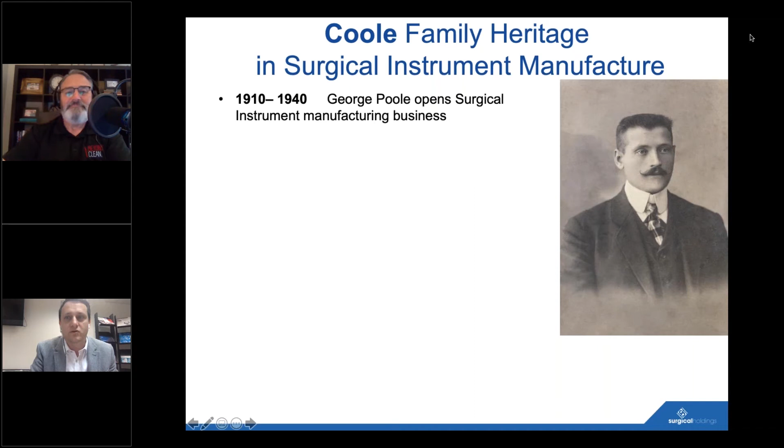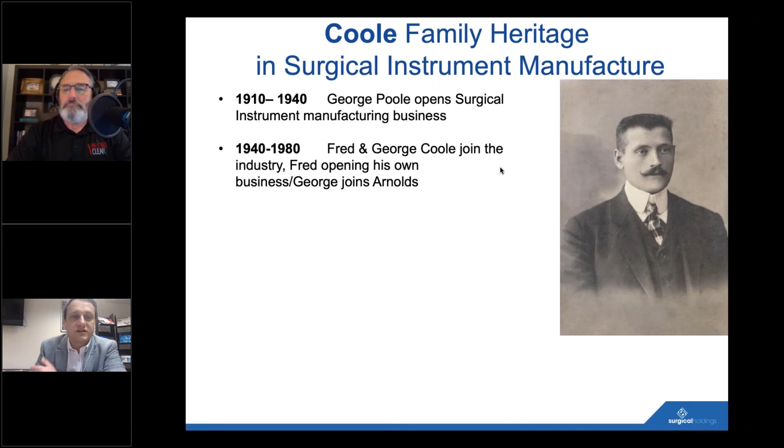But just to give a bit of introduction to myself, the reason I'm involved in surgical instrument manufacture is really a family heritage, and that goes all the way back to the early 1900s, where George Poole, it's not a typo, it is Poole rather than Coole, started a surgical instruments business in London. Then George was joined by Fred and George Coole, who were his nephews, who trained as surgical instrument makers from the early 1940s all the way through to the 80s.

And then Phil Coole, who's my father and the chair of Surgical Holdings, which is a company that I'm the MD of, got involved making surgical instruments as well, because there weren't enough of the family already involved. And Phil eventually opened his own business, Surgical Holdings, in '87, and we're still open and going strong. And finally, I've been involved for around 25 years in surgical instrument manufacture. I was an apprentice surgical instrument manufacturer and trained for a few years under apprenticeship. I don't think I was the greatest technically, which is probably why I ended up in the office. But yeah, I learned the trade and what it takes to manufacture.

I do have one slight admission here. The guy in the picture wasn't my granddad or great granddad. I'd actually just Googled man from early 1900s because I didn't have any pictures. So there we go, there's an admission. So I'll just attempt to get rid of my face for you all.

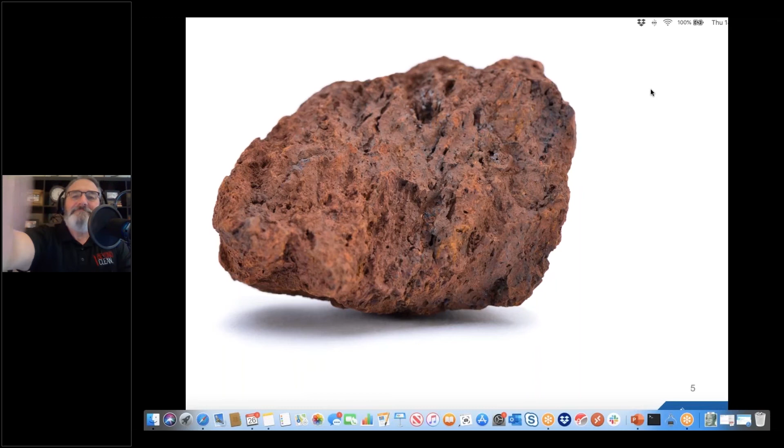So this is where we start, and for me, every story has to have a hero, and here we have the hero on the screen. I'd normally put it out to the audience to volunteer what this might be, and I've had everything from chicken nugget to, I think my son called it a piece of dinosaur poop, but it is actually a piece of iron ore. And the reason I feel this is the hero with respect to surgical instruments is that iron extracted from iron ore makes up the majority of a surgical instrument, around 80% of a surgical instrument.

And in addition to that, there are of course other elements such as carbon, nickel, and chromium that all play a part in the design of the instrument. So this is iron oxide. This is our hero, if you like, in his most comfortable state. This is the most stable state of iron. So just bear that in mind as we go through, and you'll pick up on why this is important.

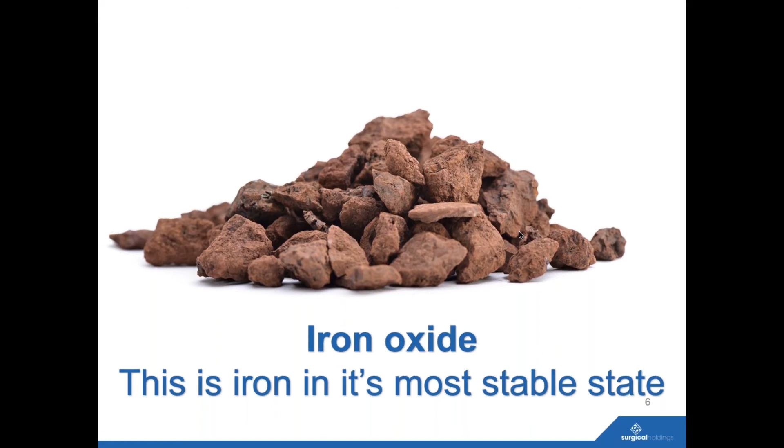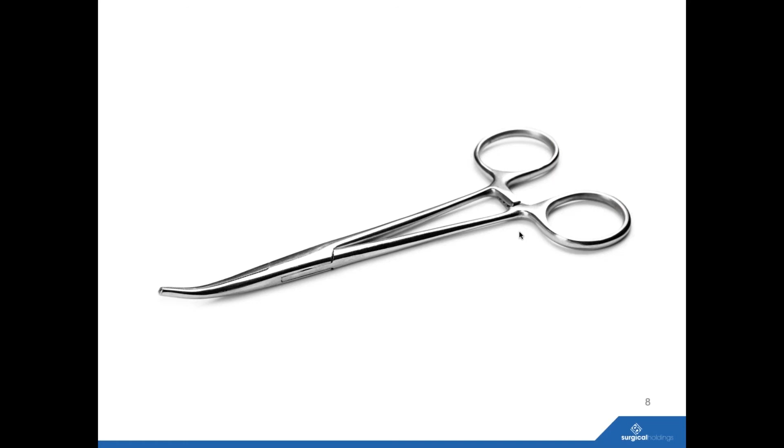So as we mentioned, iron in its most stable state is iron oxide. You have to smelt the iron ore to extract the iron, and then we put it all together, and as an alloy we have stainless steel. What might look like a nice shiny surgical instrument here, just bear in mind that there's a lot more going on underneath the surface. There are lots of different elements to it, the majority of which, as I mentioned, is iron.

And other elements: for instance, carbon gives a device its hardness, and chromium, which I'll mention, allows the device to be passivated. So rust, and we'll all probably have an image like this. My garden gate hinges are particularly rusty, but rust is nature's way of showing us who's boss. Iron plus oxygen plus water equals hydrated iron oxide.

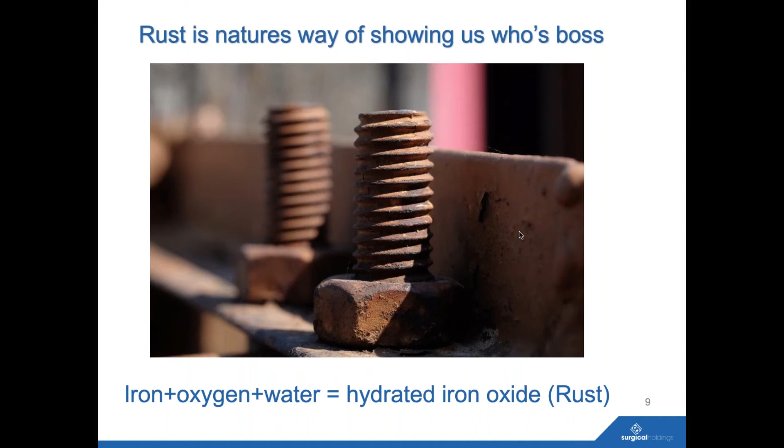So it's obvious to say that iron, in its most stable state, has a benefit of mixing with water because it allows it to form rust, and rust has a very close relationship to iron oxide. So there's the relationship there.

So what we have to do is play our part and be the bad guys in this relationship. That's everybody from sterile processing to surgical instrument technicians to theatre managers; all stakeholders are involved in handling surgical instruments. From a sterile processing point of view, the first step to breaking up this love story is to make sure that the instruments are completely dry.

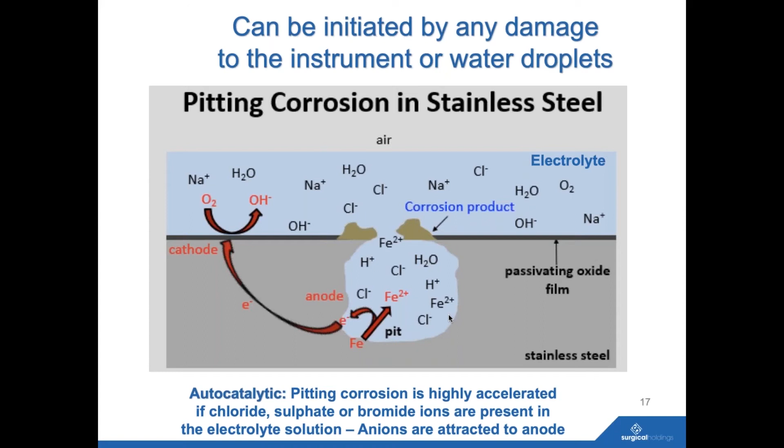This is the sort of image that you may see when you can see the start of chlorides attacking the surface of an instrument. Also to add that organic residues such as blood may also contain similar chemical properties as chlorides. So I think that's what you're saying, Bob, that potentially could kick off a similar attack on the surface of the steel.

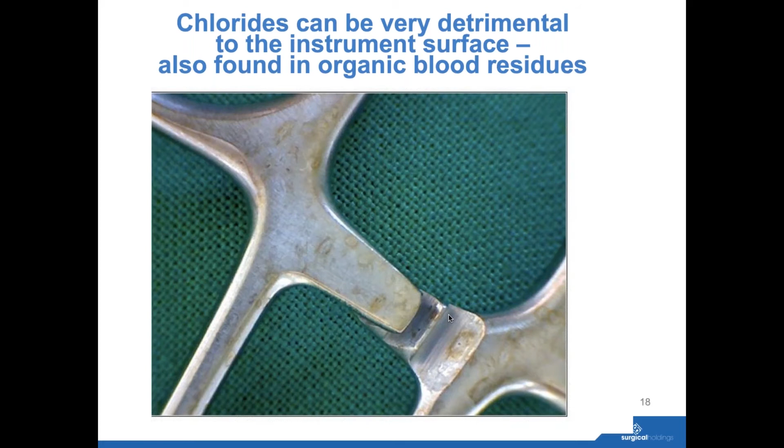Okay, perfect. So picking up from what Bob had said earlier, the vital importance of making sure that the devices are cleaned before they're passed to CSSD, because of also the issues around transit times and potential off-site sterilisation, where the bioburden could remain on the instrument for longer than we'd like, and that could start to initiate damage. And Daniel, one other point about that, some of the more susceptible instruments would be a needle holder, and the forceps they're using at the end of the procedure.

Often they're closing the patient, and these instruments will often be overlooked, and so I see a lot of corrosion where the tungsten carbide is soldered to the end of a needle driver or forceps where the blood stays on the instrument, because typically they're in a hurry to turn the room over, get to the next patient, and they'll toss those instruments in the set without really cleaning them at all, so they can have a big impact. I see it a lot on suture scissors, needle drivers, needle holders, and then the forceps that the surgeons are using.

Do you think that's because sometimes we've seen in the UK that some of the more common instruments, the likes of the sponge holders and stitch scissors, that are perhaps deemed to be the cheaper instruments in the set, may be overlooked, that they're not always replaced when they should be, just because perhaps they're not playing as key a part in the surgery? Absolutely. Yeah, quality definitely plays into that as well.

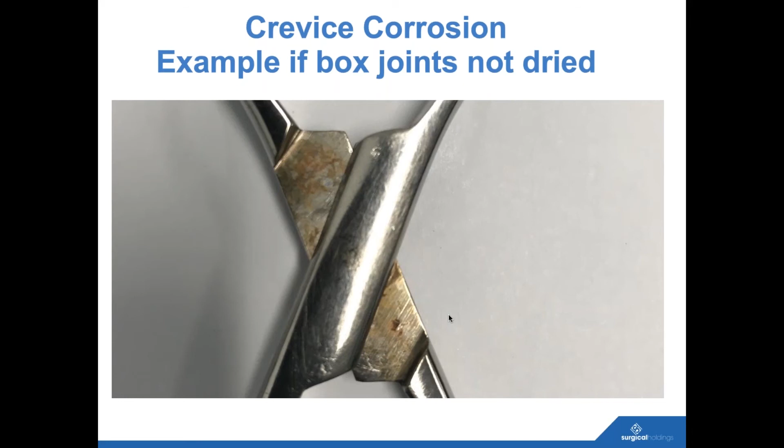Great. And so the image on the screen now, we have a crevice example. It's of how potentially you might end up with crevice corrosion in box jointed instruments, where essentially crevice corrosion is the same process as pitting. Here's just an image to show how you can start to get the corrosion from something like a box joint. The reason that this is called crevice corrosion is because for the instrument to remain passive, it has to have access to oxygen.

So with something like a box joint, you end up with this image here where you have a shield, which probably would be the box joint over the surface of the steel, but likewise it could be any sort of mating part. And of course, if water gets under the surface of that box joint or inside the scissor or whatever it might be, then the passive layer will start to break down. The process will be exactly the same as the pitting.

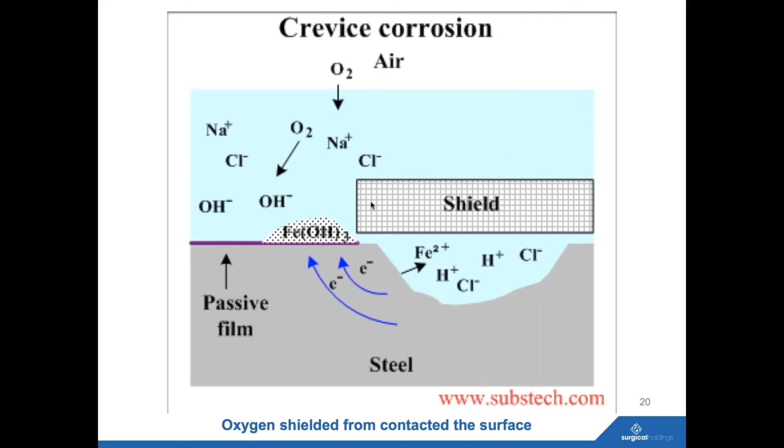So again, it will be sped up by the presence of chloride that will attack the surface of the steel. Free iron will be released, and ultimately, we've got a risk where the device could fail in use, which of course we do not want, and we want to do everything we can to avoid. So that's also to familiarise yourself with the term of crevice corrosion. Some of these processes will certainly be more common where there is only the presence of chloride. So what can we do as manufacturers and sterile processing departments to protect the instruments?

But the smoother the surface decreases the wettability of the steel. So that's essentially how quickly the water flashes off of it. In the UK, we quite widely use bright polished instruments, and I know that's not the case everywhere, but that does give you a really bright, shiny mirror finish that is of good benefit for that.

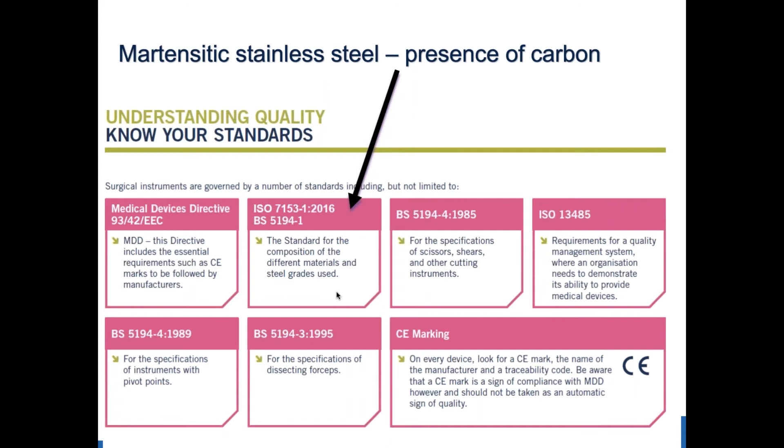But it's just interesting to pick up that you will have a variation in the carbon levels throughout the range of surgical instruments, depending on what they do. So something like a Spencer Wells, the carbon will be a lot lower, because when you harden the device, you don't need it to be as hard. You want a bit of flexibility there. So that's why it's really important that this international standard is followed.

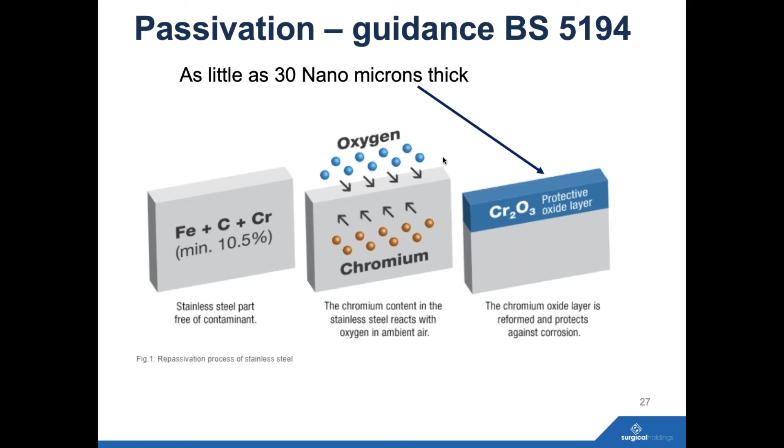And there is a British standard for producing some surgical instruments, albeit I think they're from the late 80s, from when my dad was at his previous company, and they haven't been updated since, other than the stainless steel standard. But there is a standard. It tells you how long you should passivate for. As I mentioned, it might be useful for people listening to have a look at that ASTM, because particularly for validating passivation, it's a good standard.

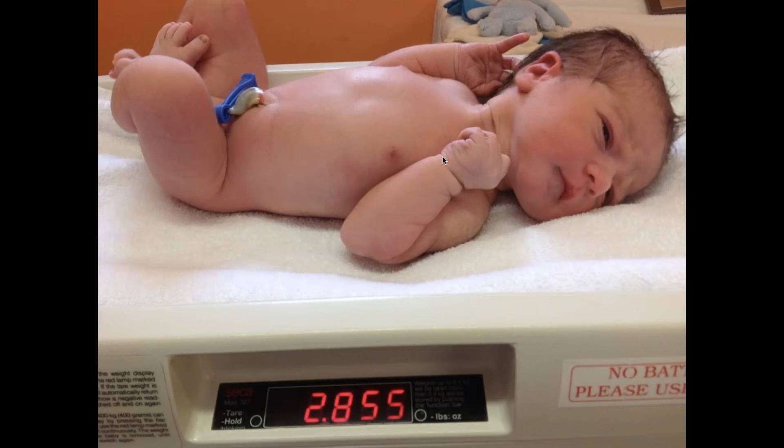So now we look at maintenance, and bizarrely, there is a picture of a baby on the screen, which you're probably wondering why, but this is my only real context of using a surgical instrument and knowing how important it was that it works. This is my son Charlie, back in 2012. I'm trying to remember his actual birthday. I apologise, I've got 4 children. He was born the 12th of June 2012, and I was able to cut Charlie's cord with a scissor. Don't worry, it's not actually this scissor.

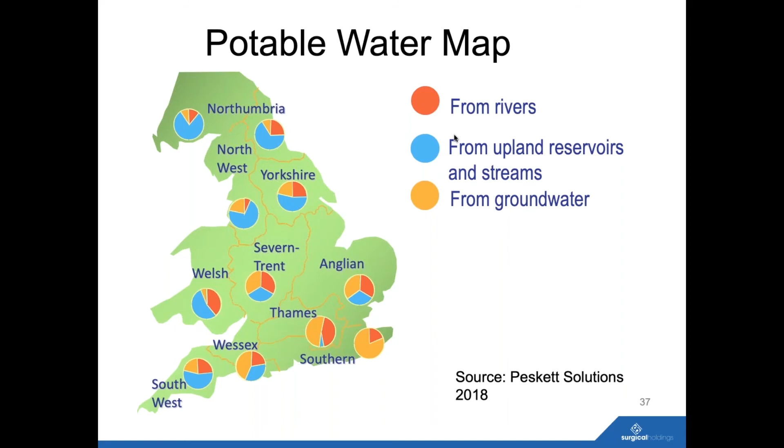So I think this is a really good bit of data to pull up. And what you can draw from that is that if you have issues with instrumentation, it might be pinpointing it down to your water content. I appreciate a lot of people have RO water, but it's certainly a consideration. And I'm no expert on RO water, and maybe it would be great to get somebody else doing a presentation on that so they can talk through the effects, but it's certainly a big consideration.

And when you have that sort of variety in content of potable water, and some... Daniel, I can jump in there a little bit if you'd like. Yes, please. So one of the things that we've always coached our customers on when you're concerning water and steam: a lot of healthcare professionals out there don't truly understand the impact that water and steam have on the instruments, and it is a huge impact.

So the four areas that we recommend that they look at are the pH level, the chloride level, and the conductivity level in the water and steam that they're using. Those three have the biggest impact on corrosion of instruments. The other really big one is silica that was on your list. That causes that brownish staining and really makes the instruments ugly.

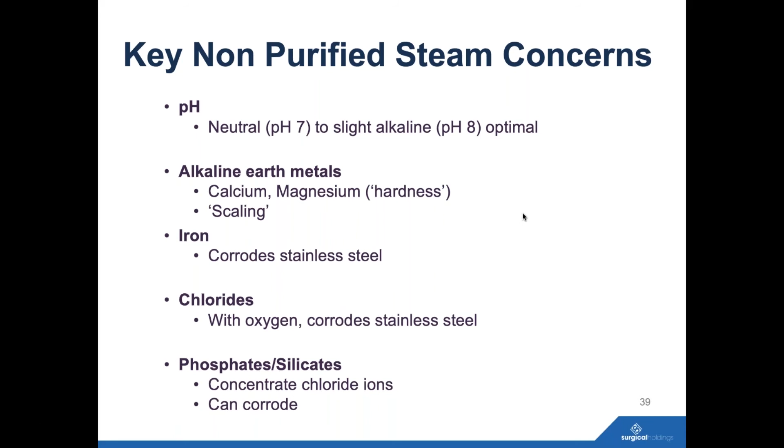That's something to certainly look out for, because you can have a hollow-handled instrument that could be full up with water that would then wash across, potentially when it gets in the vacuum, and leave all the other instruments wet. So that's just something that I think is worth mentioning as a key maintenance point.

And Daniel, I've actually had instances where when I open a sterile set to evaluate it, I've picked up a hollow-handled curette or a mallet, and I've actually had water drip out of it onto me. So it's going to the operating theater with basically contaminated water in the handle of the instrument. So great point.

Yeah, I had a similar experience in a hospital, talking to somebody in their sterile department, and they were giving us a bit of a hard time about certain things and how they should be validated. And I went to inspect a set, and the first instrument I picked up was some sort of hollow-handled retractor or something, and it sprayed in my face. So that was quite a shocking moment, really. But yeah, certainly something to look out for.

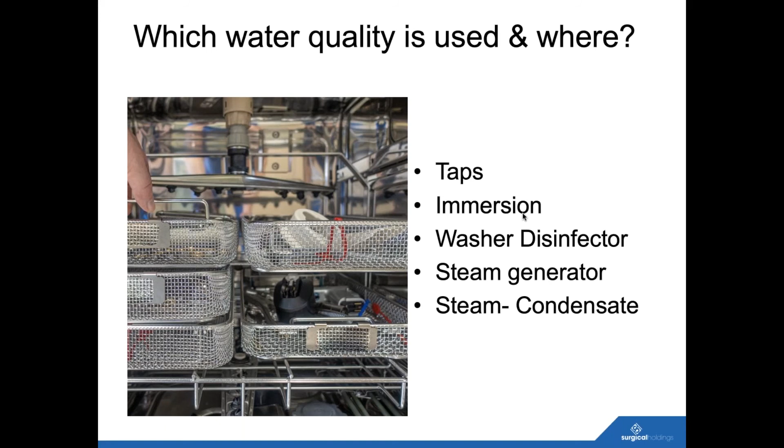I've got an image on the screen here. So which water quality is used and where? Of course, we're talking about taps, immersion, washer disinfectors, steam generation. Is there anything else I'm missing there, Bob? No, it looks good. Okay, good. And just also to mention that with tap water, you can get rust that could potentially flush from the pipes. So that can also be an unknown contaminant that could pollute surgical instruments.

Steam, obviously we mentioned that Bob went into some detail there, but even the evaporation of steam, and of course this is quite an easy visual to pick up. You'll quite often see pools of minerals when the steam's dried on the instruments, and you get almost like a circular staining on the instrument.

Are you familiar with what I mean, Bob? Absolutely. You can see the almost dried water spots all over the instrument. I see them a lot on more flat instruments like a malleable or something like that, where it's really visible, but you can find it often on most of the instruments in a set.

Yeah, I think I'm most familiar with it where I've loaded the dishwasher badly and shut it quickly before my wife's seen it, and then opened it up, and obviously you end up with water spots all over everything where you've got shadowing, because I've just been lazy and not done it properly. Absolutely.

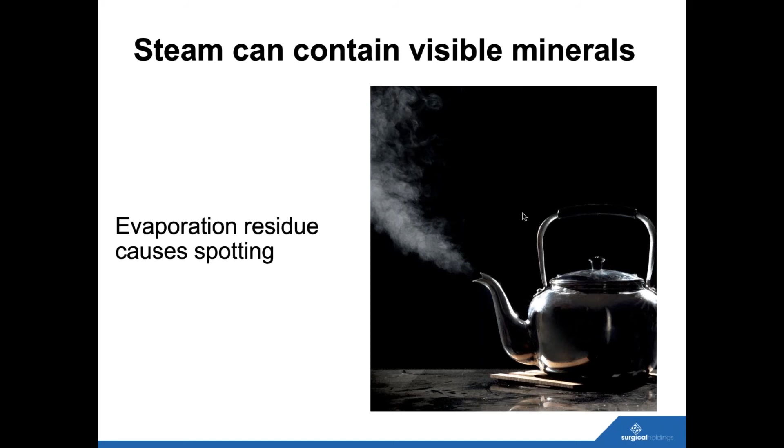Okay, so going on to surface changes now. This is just a little anecdote I'll share around silicates. A few years ago, probably 10, 15 years ago, when we were first trying to get out there to hospitals, we got a chance of an order, which I was very grateful for. And the rep at the time came to me and said, look, we can have this order, but we've got to replicate these fabulous rainbow colored instruments.

And I looked at the images and I said to him, look, there's no way we can do this. I don't know what this is. This is some sort of special coating. So anyway, we investigated it, and it turned out that actually it wasn't a special coating at all, it was actually traces of silicates from silicate-containing cleaners, I believe.

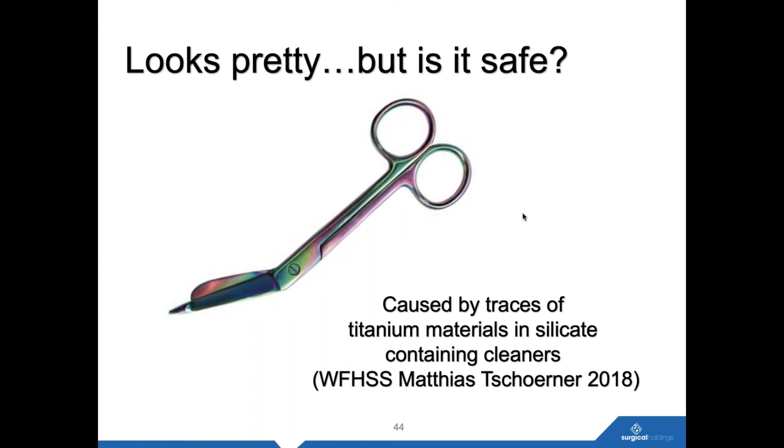A couple of world sterilisation conferences back, I sat in on a session by Matthias Tschoerner, where he went through all of the myths around silicates, and they'd done some extensive study around this phenomenon that appears on surgical instruments. Interestingly enough, the conclusion was that silicates were shown not to be harmful from a perspective of damage to the instrument, but also from a biocompatibility point of view. So although it's very good to be aware of these, it's not always potentially really harmful.

Then you've got to have the ability to distinguish between what's a silicate stain and what is a rust stain, which is obviously another thing altogether. So just a bit on silicates there. They can appear in a different way. They're drop shaped, so yellows, browns, blues, and can be from excessive silicate or silicic acid in the final rinse water of washing machine.

Any obvious ones there, Bob, that you might pick them up from that aren't mentioned on that slide? Yeah, certainly it could be from your ultrasonic, if it's not fed with water that's more purified, like RODI, like we talked about, and also the autoclave. You'll see this a lot from steam that's not treated. But it's certainly an issue.

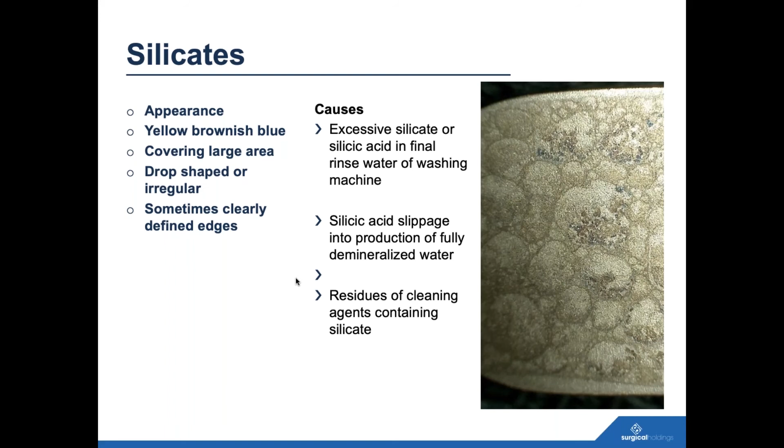I tell folks all the time, the instruments, they're ugly, but they're okay to use. They want to send them out and have them refurbished as soon as they can, because like you said, it could make it difficult to determine whether it's a silicate stain or true bioburden or something that has remained on the instrument. Yeah, and in the case of the example I gave, they thought that was actually a feature of the instrument. They are obviously extremely stained, but they can give that almost rainbow visual.

Just a couple of other instances, obviously chambers of autoclaves and I guess washer disinfectors as well. You can see things like lime residues, and they're made from 316 stainless steel generally, so they'll be subject to the same issues around passive layers breaking down if chemistries are used that are on the higher pH side of things. So that's also something to consider and keep an eye on. This could also be a first sign to pick up on that there might be a potentially longer term issue with your instruments. Absolutely. And it's very visual.

Sorry, go on, Bob. Sorry, Daniel. I was just going to say, a very good friend of mine, Dr. Gerhard Kirmse over in Europe, who I used to work with, used a term called corrosion flu, and basically said that this rust, this staining, this corrosion can spread like a flu or a virus from instruments to machines, from instruments to instruments to containers. So it's really important that you look at the entire process. I really liked how he talked about that, calling it the corrosion flu.

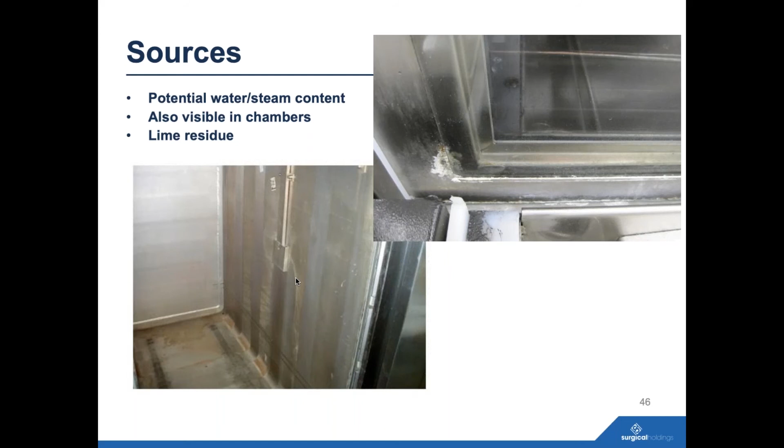Yeah. I mean, it is something you can literally sometimes follow through the whole tray. If you get a tray and you hear that there's an issue with perhaps one rusty instrument, you can literally track it through. Sometimes you might see older scalpel handles, old nickel scalpel handles, that would have a similar sort of issue where they rub, you get brown stains rub off and that sort of thing. So it's certainly something to be aware of, and that's the important point: if you're diagnosing issues on instruments, you've really got to look through the whole tray and perhaps beyond that to really get the full picture.

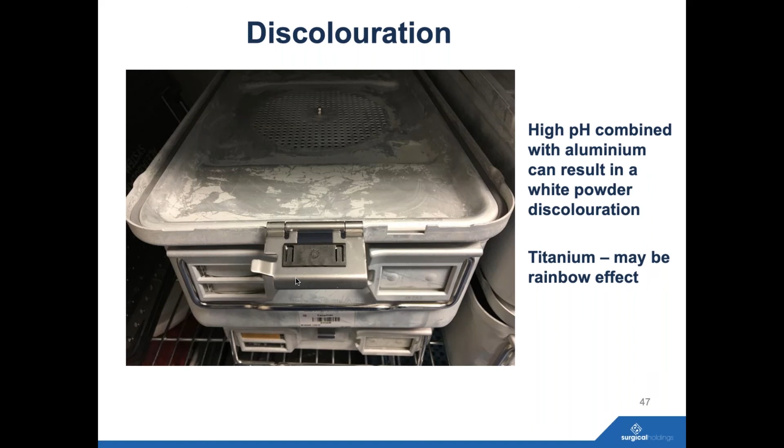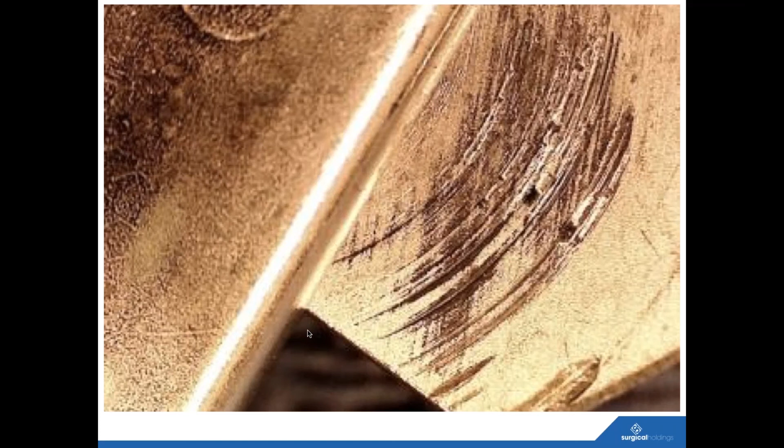So just to share a few common images we see now that I'll run through relatively quickly. This sort of corrosion you might find in box joints and some scissors, where there's not perhaps signs of corrosion as yet, but where a lubricant may not be used with the instruments. And it's the same story with the surface of the device. If the surface of the steel is compromised, then that will leak free iron and the process starts. So the message there is that if you see those sort of tide marks occurring on your instruments, act quickly and ensure they're lubricated to take care of them.

Daniel, that's a really good point there. I'll bring up something that I share here in the United States. I often tell customers or hospitals that I'm working with that they do not even need to use the lubrication cycle in their washer disinfectors. Often the amount of lubricant injected into the cycle, if you divide that by the number of instruments in the chamber, they're getting really minute traces of lubricant, and a lot of hospitals rely on only that. They're not lubricating at the inspection and assembly station where they should be, because that's where the staff can really feel the tightness of that box lock or the joint of the instrument.

They can see that kind of staining. But like you said, it's important when they see this starting that they send these instruments out to get them refurbished as soon as they can. Otherwise, it will definitely lead to pitting corrosion. Yeah, this is generally known as fretting, or the start of fretting corrosion. But you're better off, in my opinion, using something like a pen lubricant applicator that you can really get in there and target the key areas of the device, rather than just washing it all over the device, which might cause other issues, far beyond just the localized corrosion that can be avoided by doing so.

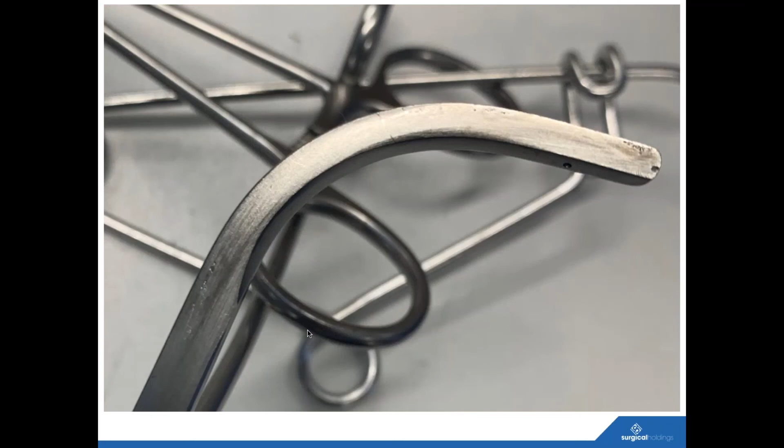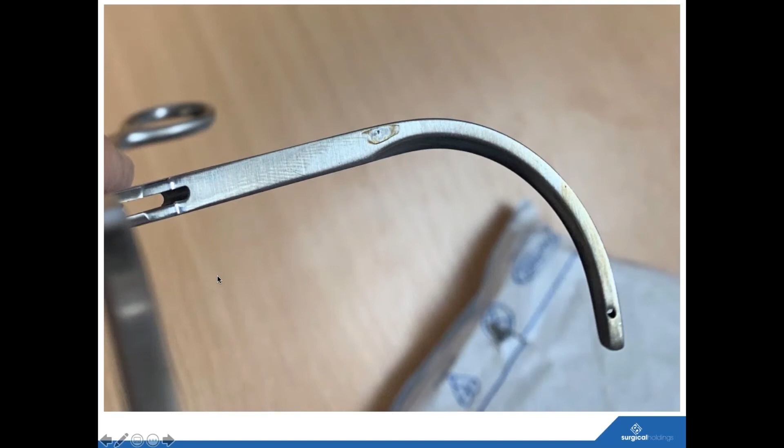You'll see the little hole in there where the pitting has started to sort of take a hold. But again, this really shows the importance of cleaning the devices thoroughly after they've been used, or as well as you can in the time you've got, and just monitoring these key areas where there may be pressure on the device or contact points.

So I think you can also see on the end of the device that where again it's closed up and it's tight, that obviously perhaps when somebody's finishing using it, they're closing it up. You've got the pitting there that's picking up on the end there, which obviously we don't want to be seeing.

Interestingly to add, this is actually from a cardiovascular set, where it does seem that a lot of saline is used as well. So we're picking that up as an issue that's causing damage to a lot of instruments. There's the use of saline in surgery. So I'll be interested to get some input from anybody at the end on that as well.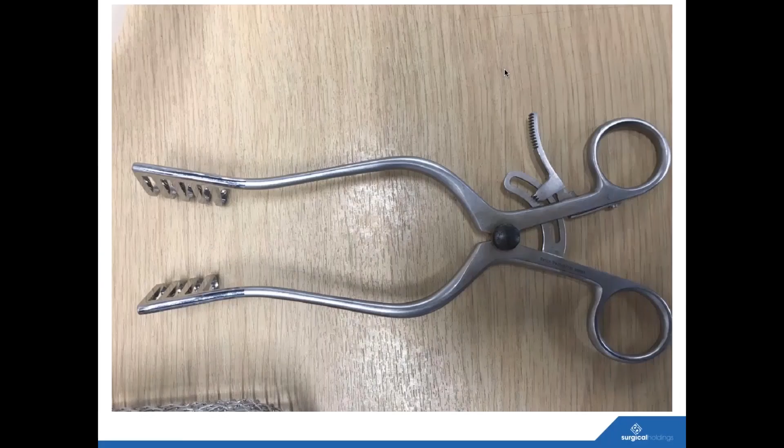So I think this is a rather nice looking retractor, but it seems that it's either been repaired and obviously the part that's been replaced, or happened to be completely different steel from when it was manufactured. So this is probably some sort of mild steel screw that's been used there, and that's, I think, really from the manufacturer's point of view.

We've talked a lot about the damage that water can do and silicates and that sort of thing, but as manufacturers, this goes back to using the right materials for the right devices, and clearly this has either been repaired and that part has been replaced with incorrect steel, or when it was manufactured, somehow the instrument has gone through final inspection and passivation, and it's not been shown up.

But from our experience, when you passivate something, which, for those who don't know, is the artificial process that we carry out, putting the instruments in acid for a certain amount of time to create that passive layer artificially in the manufacture, I think generally you'll see poor steels darken, and that's something to look out for.

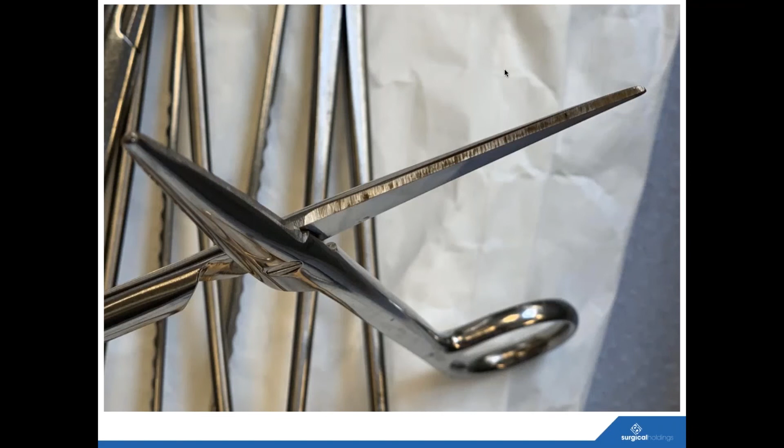And of course, man-made issues again in relation to maintenance. This is a scissor that looks very, very overground. The sharpening is so coarse that it's almost created serrations, and it wasn't meant to be a serrated scissor, but it's created almost serrations along the blade where corrosion has started to take place and staining has started to take place. So obviously, very early stages, but nothing should be finished like this. It's obviously got cause to start to stain.

And I'm just going back to the surface finish side of things. That should be a nice, clean, polished finish to ensure that the device does what you need it to do, be that cutting tissue or whatever. But yeah, you don't want to be seeing that sort of finishing edge, because you're going to enhance the issues related to corrosion.

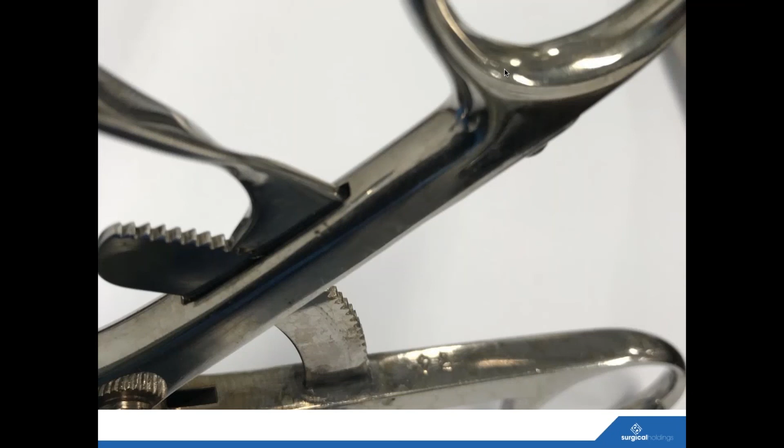This is something we see a bit less nowadays because of the widespread use of laser welding, but these sorts of retractors, your Travers, West, Weitlaners, previously may have either no sealant round the rack here we see at the bottom, or potentially solder or something like that, but that could easily be eaten away. And again, it's a perfect recess for when the instruments are washed, for them to sit in there to remain wet and for that damage to occur.

So if you're buying new instruments, you should certainly look for those areas to have a nice clean laser weld around them, so you know there's no areas that water could potentially sit into after reprocessing.

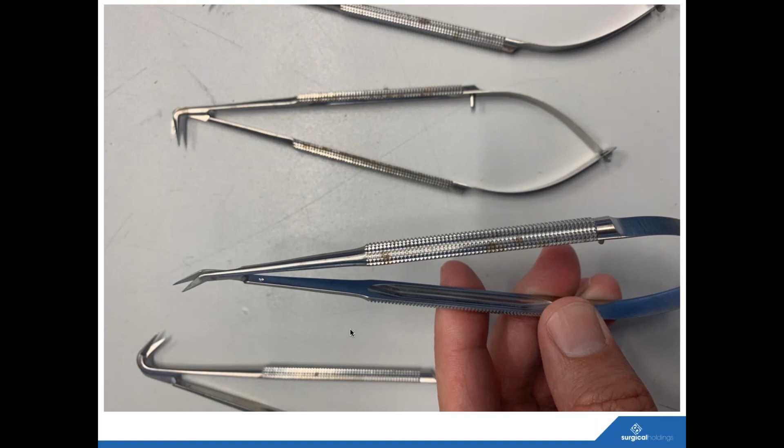And some of the devices, just because of how they're used, as a delicate Potts scissor in the picture, have a really nicely finished grip with serrations that's just generally quite tricky. I wouldn't have said it had Bob not mentioned it, but it just happens to have patterns where the surgeon's been gripping it here. Bob, would you say? Oh, absolutely. It's often overlooked and not cleaned, and it's pretty common to find on these types of instruments. And these are some of your most expensive instruments as well. So it's really important to pay close attention to those grooves and serrations.

Yeah, sure. These are really high-end instruments. There's no question of the quality of the steel, but the nature of the design leaves these quite tricky knurls, and I should imagine it's quite a challenge to ensure they're clean, but also a challenge to pick up when you might have some bioburden retained in them, or to check that they're actually completely dry after reprocessing and sterilisation.

And just to say thank you to a colleague, Paula Singleton Hobbs from B. Braun in the UK, because I've got one of her slides here from a presentation we did together a couple of years back.

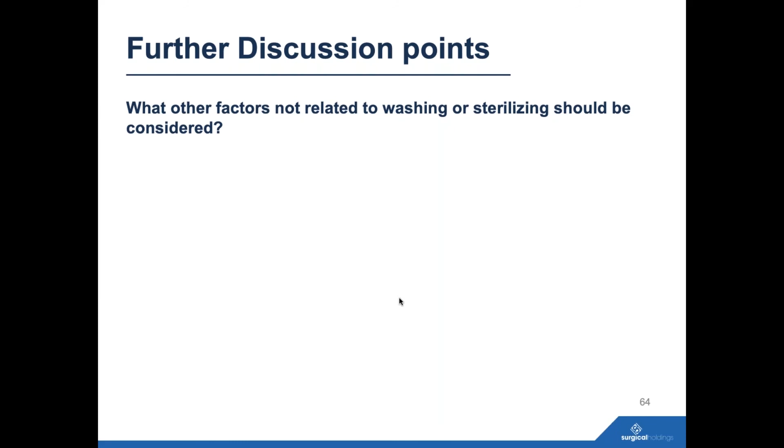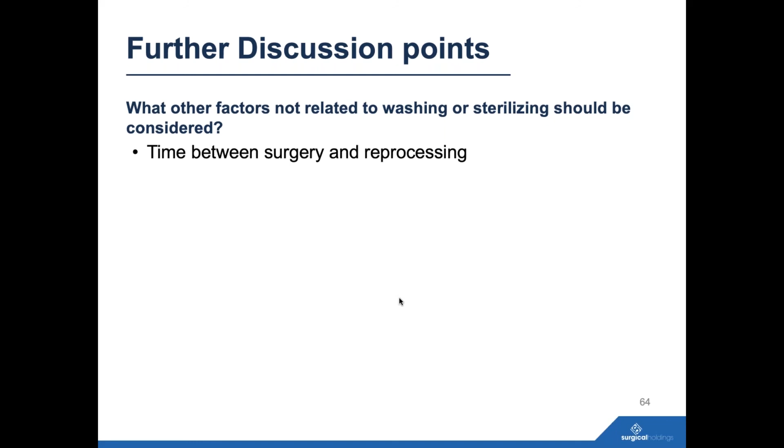So further discussion points that I'd quite like potentially somebody else to pick up on another webinar, if we can do that. Things to consider when you're looking at surgical instruments versus water. The time between surgery and reprocessing, how long is that? Is it that you've got off-site sterilisation and stuff is used and then it's sitting there overnight? And obviously my bullet points didn't work, so a whole load of others have jumped in. We're also looking at different materials now. There are medical grade plastics that are used frequently on instrumentation, titanium. They all have their own considerations when looking at water and washing surgical instruments and staining.

Use of pre-cleaning sprays and gels. I posted a video a couple of weeks back of me using, and I'm looking at it now actually, a Forever Prep machine that I think was from Ruhof, which seemed to be a really neat solution for localized application of sprays and gels. I've tried others and that worked really well. I left the instruments for a few days and there was no damage or staining to the devices. So that's something to consider.

Lime residue, I think I'd like to look into that a bit further and see what potentially the damage of that could be, because it doesn't seem to get as much traction as the other issues such as pitting and chloride damage.

Instrument design and reprocessing instructions, of course, we need to improve that. And with the MDR, when it eventually comes in, as it may or may not be delayed now further because of obviously the coronavirus situation, we're going to have to look as manufacturers at validating our instruments to a lot higher level. So that hopefully will go hand in hand with a better performance through sterile processing when these devices

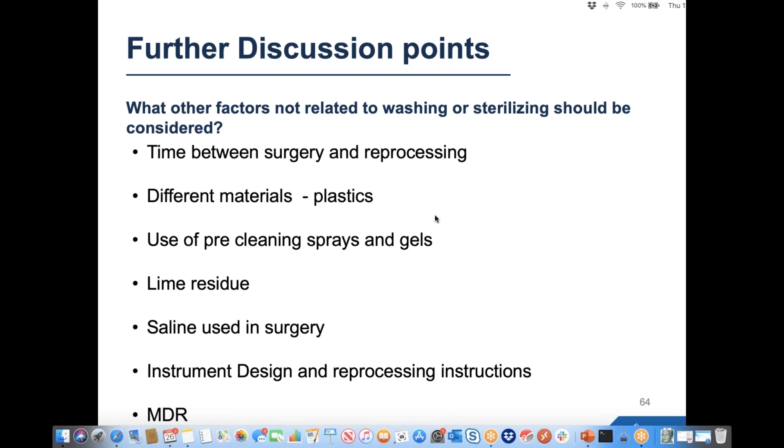Okay. Well, it's certainly something that's worth exploring, and I think we're more or less coming to the end now. I just wanted to reference the famous AKI working group Red Book. So this is a document that's produced by a collaboration of companies in Tuttlingen. There's really great detail around water spotting, discoloration and corrosion. You can literally read through the ins and outs.

And I think your colleague you mentioned, is it Gerhard? I think he probably had some input on this through Aesculap maybe. I think some of his colleagues are actually on the call. But yes, he absolutely was. Yeah, so it's a really crucial document, I think, if you're in sterile processing. Also to mention the ABHI document, which really has some good context from a UK perspective. So I'll share the links for both after.

So just finally, just to leave you with the image of what I described as our hero at the start. I think we just need to consider the importance that iron plays in surgical instruments, and of course its desire to get back to its most stable state, and how it's able to do that through mixing with water or mixing with chloride, or mixing with a solution of water and chloride. So please bear that in mind.